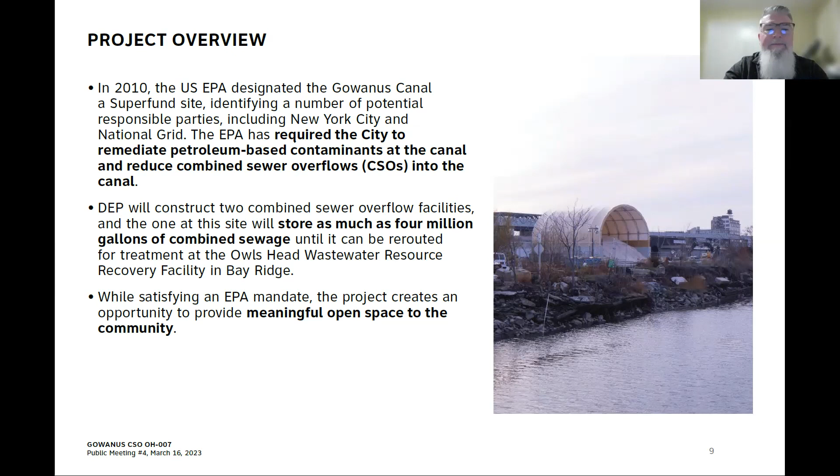CSO retention facilities intercept that flow from discharging into the canal and then store it until after the wet weather event, and then pump that flow back to the wastewater treatment plant for treatment. Next slide, please.

So our goals on this project: obviously the number 1 goal is to satisfy EPA's mandate, but also to construct a resilient and sustainable facility and provide a welcoming and valued community asset. Through these public meetings and other avenues, we've heard from many folks that embedding a sense of environmental stewardship and education into the project is a priority, and we've worked hard to ensure that this project reflects that input. Next slide, please.

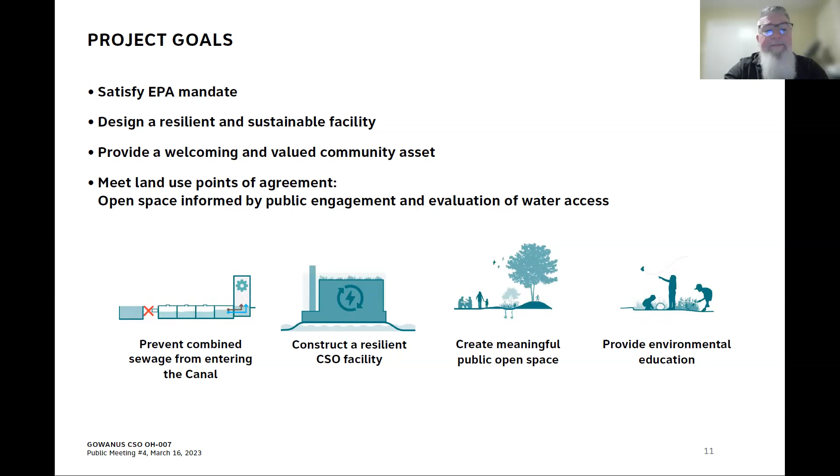So I know many of you are already familiar with the site and know that it has been home to the Department of Sanitation's salt lot, the Big Reuse composting operation, the Gowanus Canal Conservancy's ecological stewardship and programming, and a number of manufacturing and industrial businesses on 5th Street.

So what we intend to do as part of the project is establish the new CSO facility on the site in the location of the existing salt lot. But before we do that, we're going to relocate the Department of Sanitation's salt shed and the Big Reuse operations south of that, and reestablish the Gowanus Canal Conservancy on the site. And then also, as shown mostly in green there, provide a publicly accessible waterfront open space, as well as some ecological restoration.

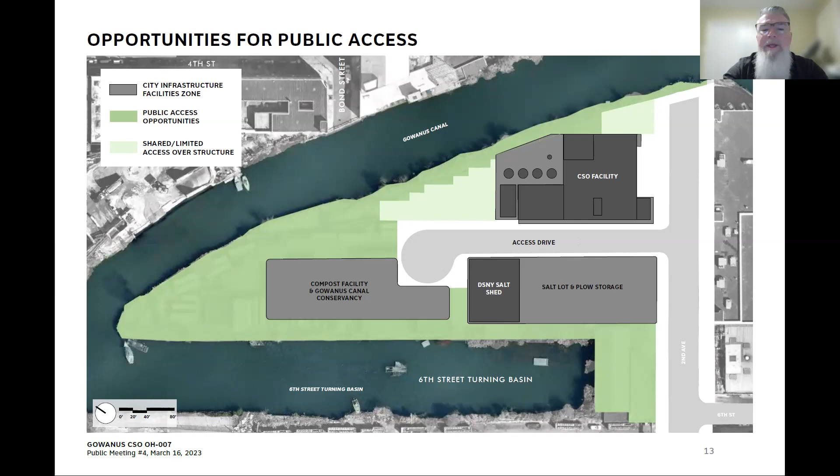We have a very ambitious project schedule in order to meet the EPA mandated milestones, and over the last few short years we've made great progress. The design of the salt shed has been completed and approved by the Public Design Commission, and the design for the first construction package has been submitted to EPA. We're on target to begin that first phase of construction this summer—we're shooting for June.

So Alicia mentioned that this is the fourth in a series of public engagement meetings, and your feedback has truly guided the character and the design of the city's facilities and the public open space. We will begin the first phase of work here this summer, and that very specifically includes the site preparation and construction of the new salt shed and temporary composting facility.

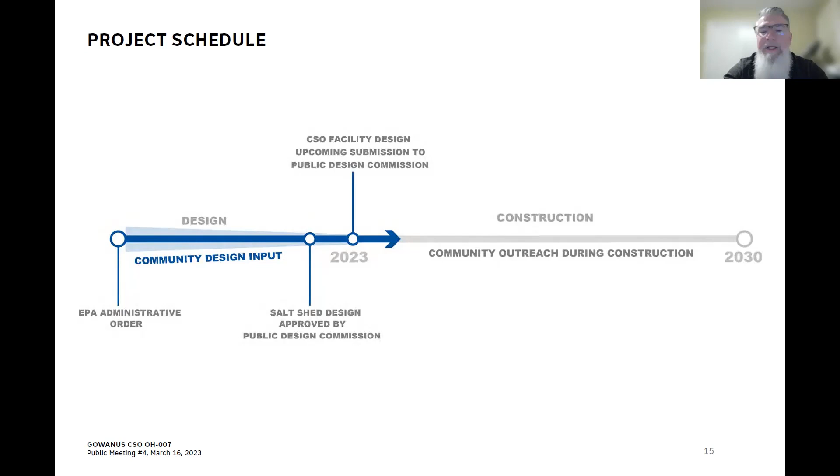And now I'm going to hand it over to Jessica from SCAPE. Great, thank you. My name is Jessica Arias. I'm a designer at SCAPE, and I'm going to give an overview of the design process and the overall site concept.

So we've had three public meetings prior to tonight, and all of the feedback that we've heard has been extremely helpful in helping us to develop the design for the public realm. So we just want to thank you again for taking the time to come to the meetings, and thank you for your very thoughtful feedback.

We've heard some very clear priorities from the community, and we're really excited tonight to be able to show you how we've incorporated those priorities into the design. Some of the things that we've heard overall are the need for ecological restoration, preserving the Gowanus character, the need for different kinds of public water access, and the need for flexible gathering spaces.

So the last time we met, we heard some great feedback. We heard a lot of excitement about the wetland space and the reference to the historic infrastructure in Gowanus, the way it's reflected in the CSO facility design. We're excited about that too.

We heard that the public requested to maintain access to the water at the street end, so we are going to be able to share some more details with you about that tonight. We heard that the need for public restrooms and other site amenities, so those will also be incorporated into the design.

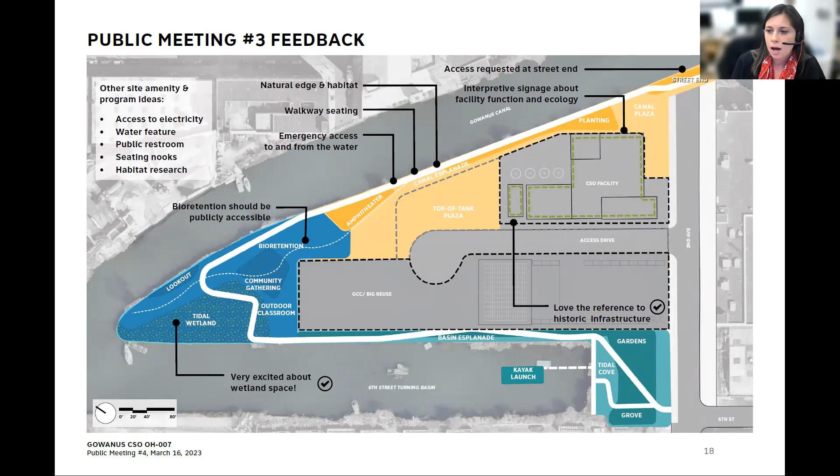And here are some design goals that have come out of this public feedback process. The design will encourage environmental stewardship by providing educational and cultural spaces. These are flexible cultural and educational spaces that will be able to be used throughout the year and by different user groups. The design will improve site resilience through material choice, planting, and bioretention.

This design will provide public access to and along the waterfront by allowing users to get to the water in different ways. The site design will support ecological functions with various estuarine habitat types, including a wetland that will be a very unique feature and provide ecological restoration on site.

And a very big feature is that we are creating universal access to the water. One way we're doing that is with an ADA accessible boat launch, which we've been working closely with the Parks Department to be able to provide here so that the site is accessible to all users.

And finally, the design celebrates the Gowanus character, which is this unique mix of industry and nature, through the design of the facilities.

And in addition to all of the public engagement process, the team's been in very close coordination with a number of city agencies. Some of those are the Parks Department, DSNY, the EPA responsible parties, and the Public Design Commission. We've also been in very close contact with the community stakeholders that are on the site—those are Big Reuse and the Gowanus Canal Conservancy. So this coordination has really guided our public realm design, and of course it will continue into the next phase.

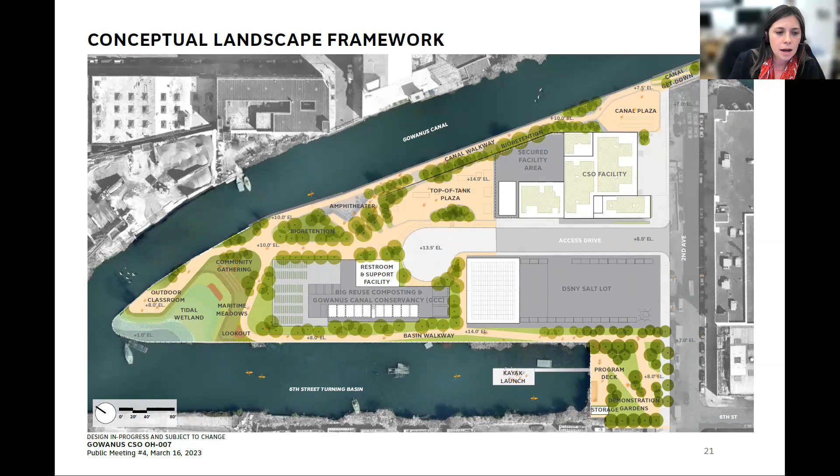At the Canal waterfront, the Top of Tank Plaza and the Canal Plaza are two flexible gathering spaces, which we heard as a public priority. These are gathering spaces that interact with the facilities and functions on the site. The canal walkway connects the plazas and helps bring people down to the water. The canal get-down at the street end helps bring people directly down to the water, and the amphitheater provides a gathering space with amazing views across the canal.

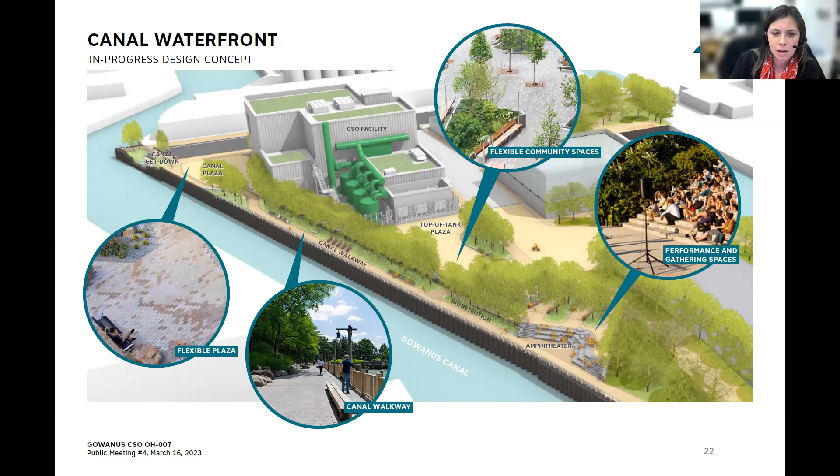At the point, we have 3,000 square feet of soft wetland, which is a very ecologically unique place with opportunities for education that allows for daily tidal inundation. Surrounding that space, there are outdoor classrooms and opportunities for environmental education.

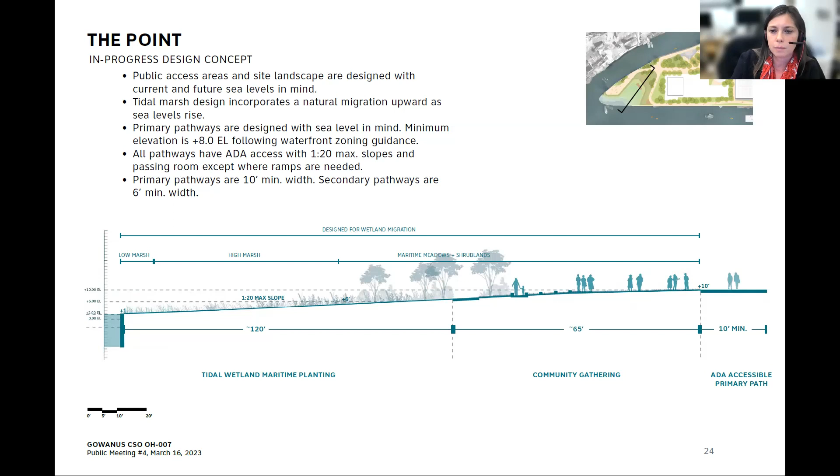This is a cross section. You can see at the top right of your screen this is a slice through that wetland area, showing the gradual slope from the water up to the site. The tidal wetland is responsive to current tides because different plant communities grow at different elevations along this slope. It's an opportunity to see wetland migration in action, and there are pedestrian pathways that lead right up to this unique planting area.

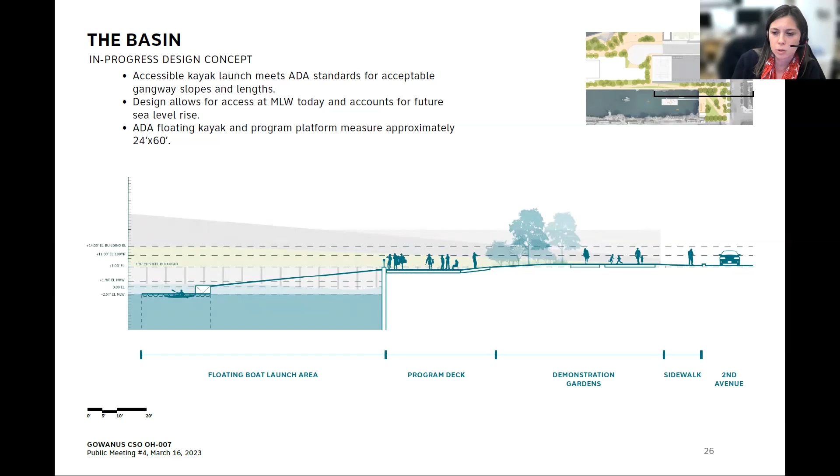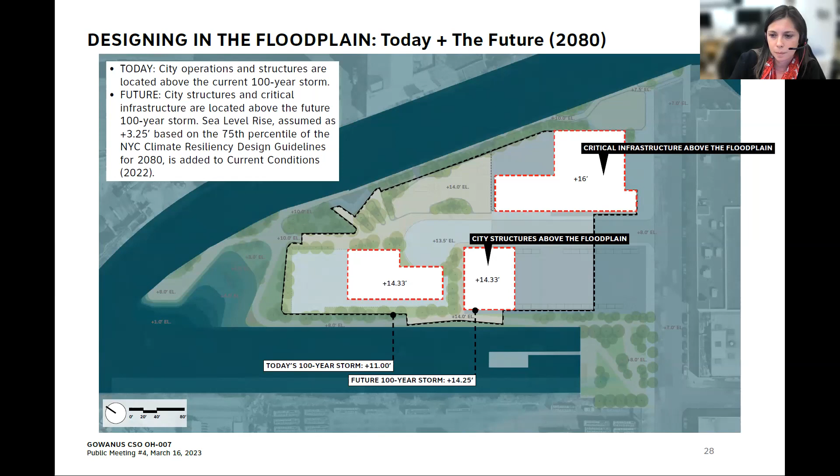So now I will pass it to Kevin, who will talk about the CSO facility design.

Thanks, Jessica. Hello, everyone. My name is Kevin Keating. I'm a partner at Soldorf Architects. It's a pleasure to be here again with you this evening. Please allow me a little bit of your time to walk you through the designs for the CSO facility itself and the area immediately surrounding the head house. The narrative for our design approach really has come from the community, and I hope you can see this in this presentation.

As Jessica mentioned, this is considered phase 2 for the project. It consists of the CSO facility itself, the underground work, and the immediate area surrounding the facility, as shown here within the dashed line.

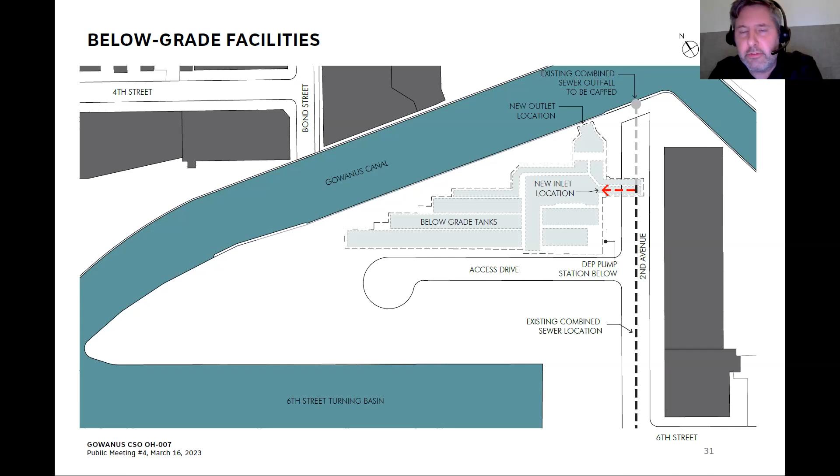Just want to indicate how the facility is located and why it's located where it is. There is a current CSO pipe under 2nd Avenue, which currently discharges at the outfall point that will be capped at the end of 2nd Avenue. The water will be diverted into the facility, indicated where the red line is, coming into what will be the primary screening elements that clear the water of any physical debris that may enter or have infiltrated into the system. The tanks will sequentially fill up as a storm is still hovering over the city. Once that storm dissipates, the water will be pumped through the degritters and down to the Owl's Head water treatment facility in Bay Ridge.

We still have to accommodate them, even though they may be there just once or twice a week, or really just at seasonal times. One important element here, which Jessica touched upon, is the grade elevation changes. We are having to work with a current elevation of +7 feet at the corner of 2nd Avenue and the Access Drive, which was formerly 5th Street, up to a floodplain elevation of +14 feet.

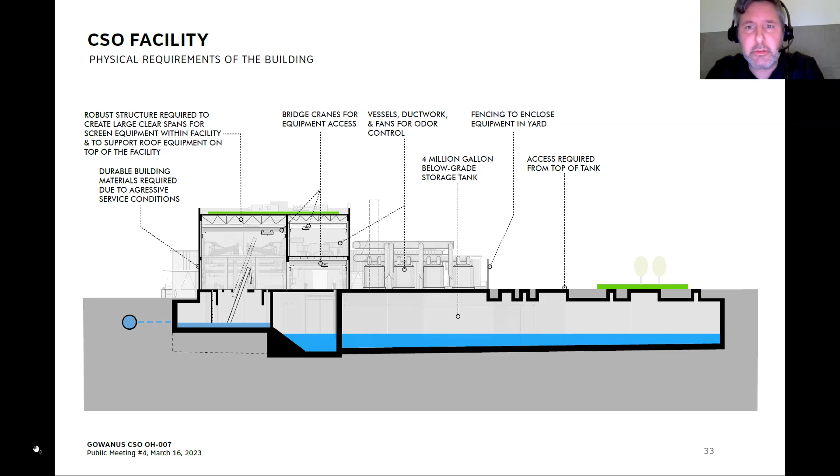We are doing our best to accommodate as much publicly accessible open space above that tank while providing as much bioretention as possible.

We are trying to achieve Envision Gold. We're working with a great group of engineers that are pursuing the highest level of sustainability possible. We will have a strict sustainability procurement process using as much recycled content and fly ash as possible, reducing the overall embodied carbon that may be in any of the material used for this facility.

As mentioned by the community, we are introducing a great amount of green roof on top of the overall facility, as much as we possibly can, to help reduce the heat island effect and manage any rain runoff that may be happening. All sensitive equipment is raised further than the 100-year floodplain; we are increasing that height, taking precaution in the long run. And obviously, this facility is storing 4 million gallons of polluted water before it enters into our waterways.

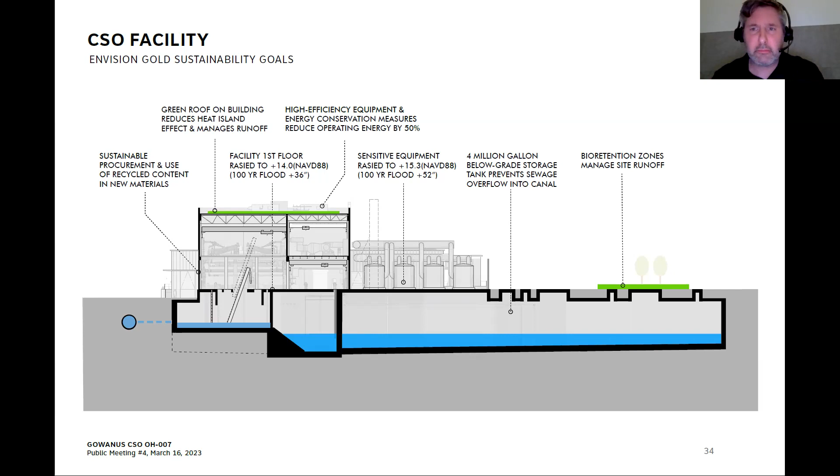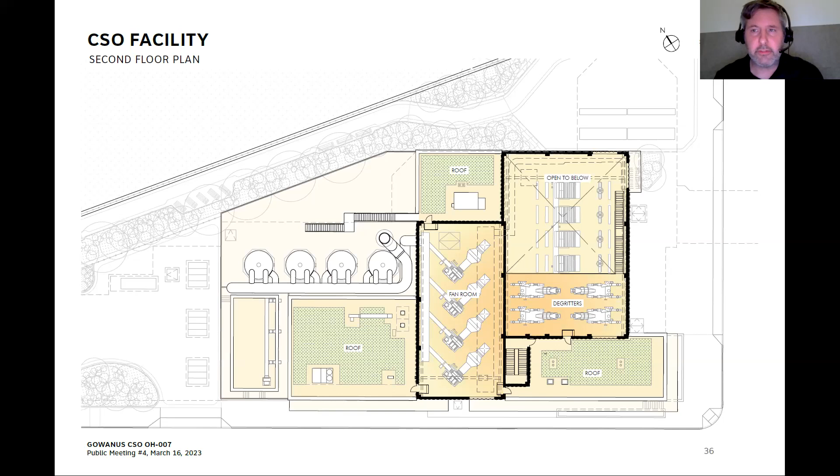Next floor up is the second level. You could see the secondary volumes peel away. On top of those secondary volumes, we are introducing green roofs. The area that projects upward is the large volumes of the screening room and the fan rooms, which support the flow of air from within the facility into the carbon vessels outside. Lastly, the roof plan is being vegetated with as much green roof as possible to help mitigate any stormwater runoff. It includes native, hardy, low maintenance plants that are drought tolerant, which will further increase biodiversity and support pollinator habitats.

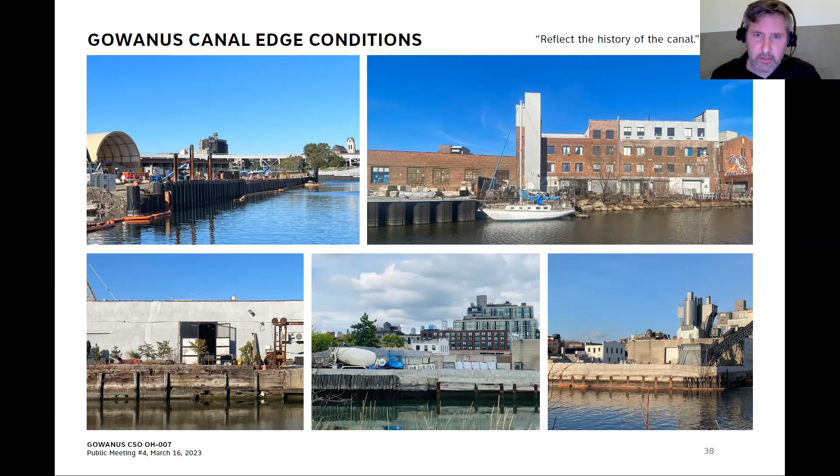These kind of anonymous buildings that are industrious in nature and have this monochromatic building palette. It's these buildings, along with the image on the next slide, that create the vernacular of the environment that we are pulling from.

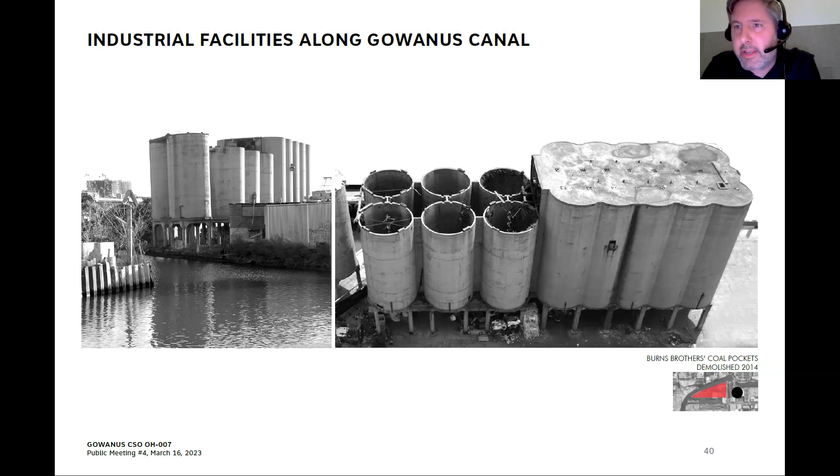The next image, please. It's this vernacular and these geometric shapes that we've really pulled from that speak to the way we've approached the design for the new facility. This was an image of a pretty ubiquitous building type and typology seen up and down the canal over the decades. But this next image is an image of a facility.

This is the Red Hook grain terminal. It's still there, still existing. You can see this beautiful harmonic facade made up of the structural elements of this concrete concave form. It's this aesthetic that we believe the community has informed that they want to pursue and achieve, and we are trying to strike that balance.

This next image shows where we're pulling from, not only the building elements up and down the canal, but also the direct bulkheading that has been introduced over the decades and over the century. It first started with timber lagging, which you can see here, and then evolved to concrete lagging. You can see here this tubular formwork that we will pick up in the next slide.

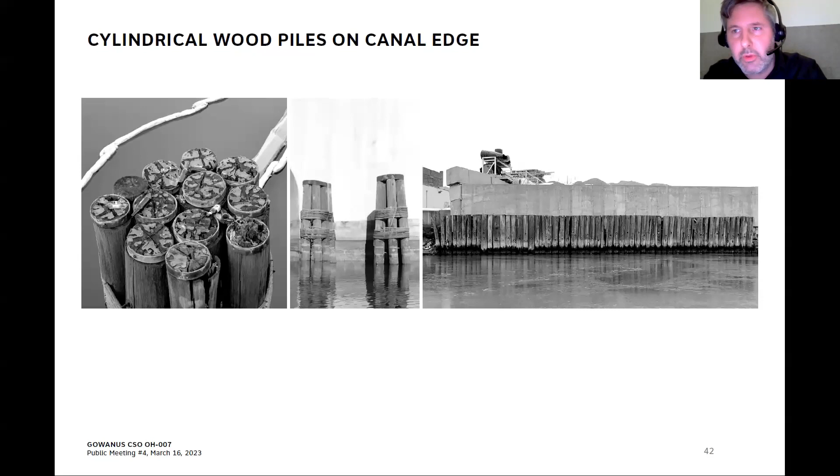With this, we've pulled together a palette to understand what we could do with this simple formwork created from concrete. We started to look at how we could peel away at it and carve into it. We've studied a lot of the formwork, and this image on the left indicates the approach we are trying to take.

This next image shows a relatively simple but monochromatic palette that again picks up on the environment of the Southwest Brooklyn Industrial Business Zone. We are using concrete for the building and its shell. Remember, there is no external shell to the building. The concrete is both the structural element and the skin for this building, further reducing any need for additional material.

Stainless steel is being used for its corrosive resistant qualities, along with apertures introduced to the facade of the building. These apertures will take on the same formwork as the concrete above and below it.

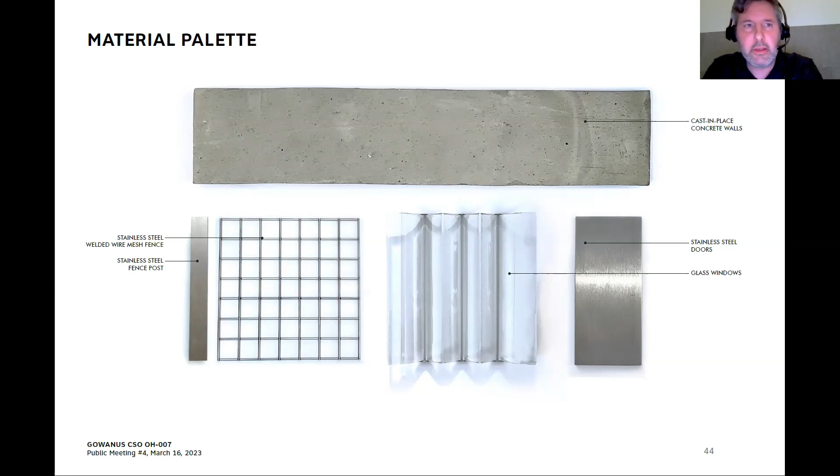This next image shows a series of full-scale models we have built here in the office. We tried to understand the mass of this building, both from afar and up close, because pedestrians will be allowed to literally feel and touch this building as they walk up and around the facility. We arrived at a dimension for these tubular forms of 26 inches, which gives a humanistic quality to the overall facility.

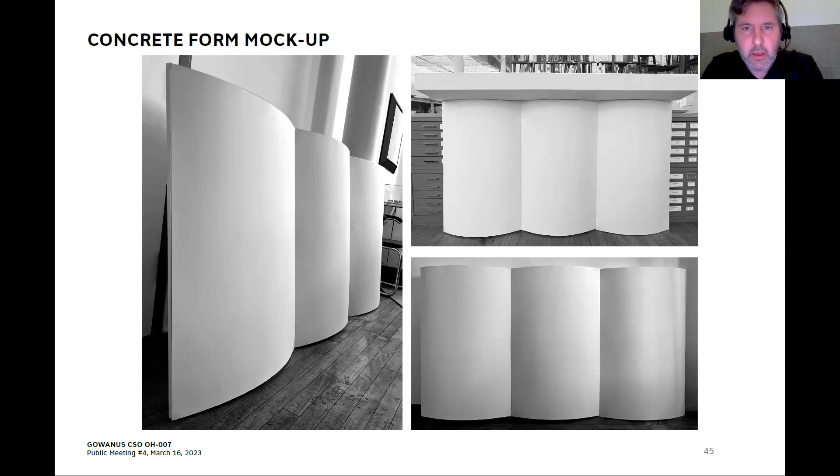There's also additional apertures on the south side, which you'll see in a few elevations we'll present later in the presentation. But with that, I will now hand it over to Anna.

Thank you, Kevin. I'm Anna Hochhalter, landscape architect with Scape, and I'm going to focus in on some of the site elements, the materiality and furnishing.

Those design details will be similar to what we're presenting today in the same design approach, but coordination with different agencies, including the EPA and other user groups, will happen at a later phase. So today we really want to focus on where we are with the design around the CSO facility.

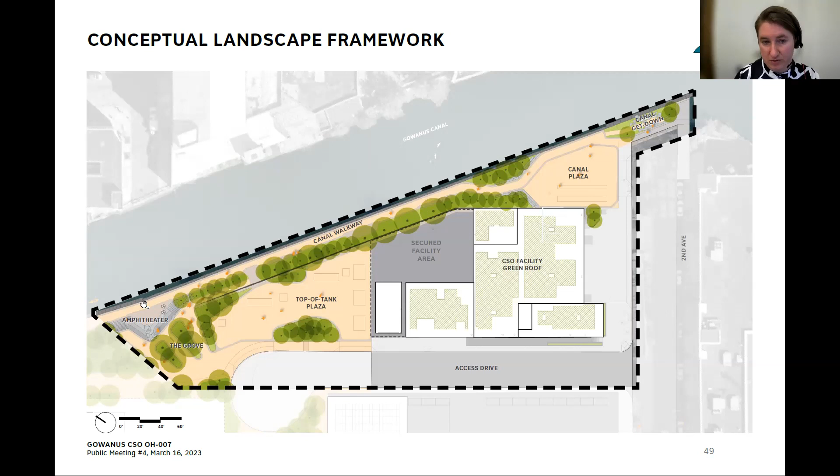We've worked closely with our engineering team to maximize the public realm to the full extent. There are a lot of site constraints here. The operations and maintenance needs are fairly frequent and require a lot of surface area to maintain and operate the very large infrastructure below grade. So there's flexible space on the Canal Plaza and top of Tank Plaza, and those are the areas with the most constraints requiring facility maintenance. The primary and dedicated pedestrian areas are focused along the canal walkway, which is vegetated and outside of those operational needs of the city infrastructure.

In our early engagement workshops, we heard a desire for the project to be reflective of the Gowanus character, and we've been very inspired by the industrial character as well—the roughness of the materiality, the rawness of stones, and an integrated kind of wildness of Gowanus itself.

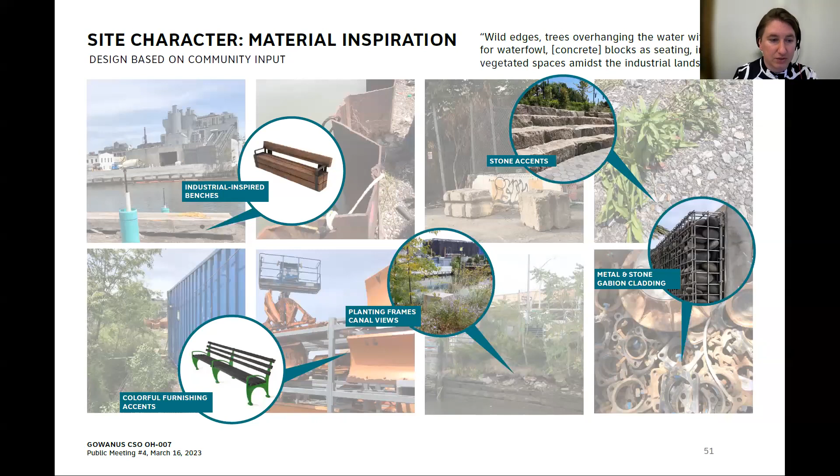At our last meeting, we asked attendees for more information on exactly what the Gowanus character meant to them. We took that feedback and are developing the furnishing and material approach we'll talk through tonight, honoring what we heard—consistent with images showing celebration of natural stone accents, working with raw materials, and incorporating planting.

Our paving strategy uses a hybrid of cool color tones to extend the industrial character and warmer color tones in the paving stones and materiality to accentuate community gathering areas, so you can feel a contrast as you're moving through the space. We're using natural stone and ADA accessible cobble in certain areas to celebrate the maritime edge of the site.

In our furnishing palette, we're using standard agency furnishings with accents of bright color where it makes sense, to celebrate and complement the industrial color pops in other areas, as well as developing a Gowanus-specific furnishing style that harkens back to the historical industrial character of Gowanus. So we're finding that balance.

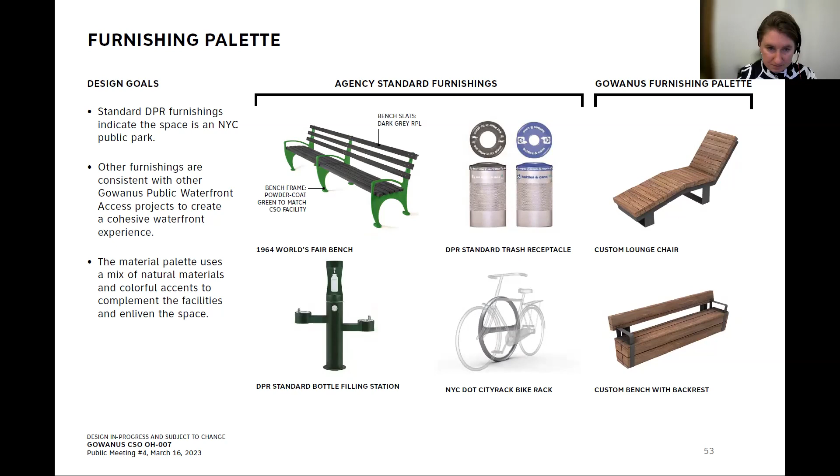Next I'll talk through our site planting strategy. Our design strategy really embraces the wildness of the Gowanus Canal. The input from our last public meetings supported that goal—you can see some quotes in the slide here.

We're designing to restore native habitat to the extent that we can, and to celebrate ecosystems from the past, historic ecosystems of the intertidal floodplain. So we're designing for plant resilience, understanding that the climate is changing—we know the seas are rising, the heat is increasing, and the storms will be more frequent. Our planting strategy works with that and celebrates it on site.

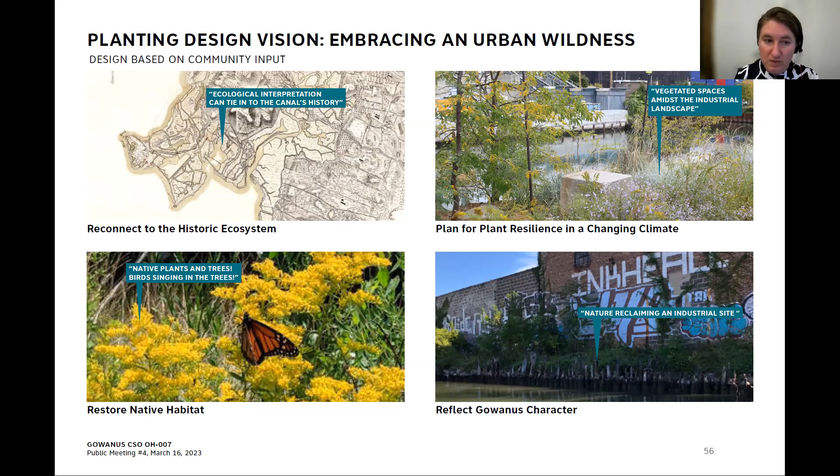Using native plants that are tolerant of coastal conditions, such as salt spray and inundation, for both today's conditions and future conditions in 2080, this planting strategy will be applied along this area within the CSO facility as well as throughout the larger site. We have tidal marsh and maritime planting near the 2nd Ave street end, areas of bioretention and rain gardens along the canal, and a green roof on the facility roof.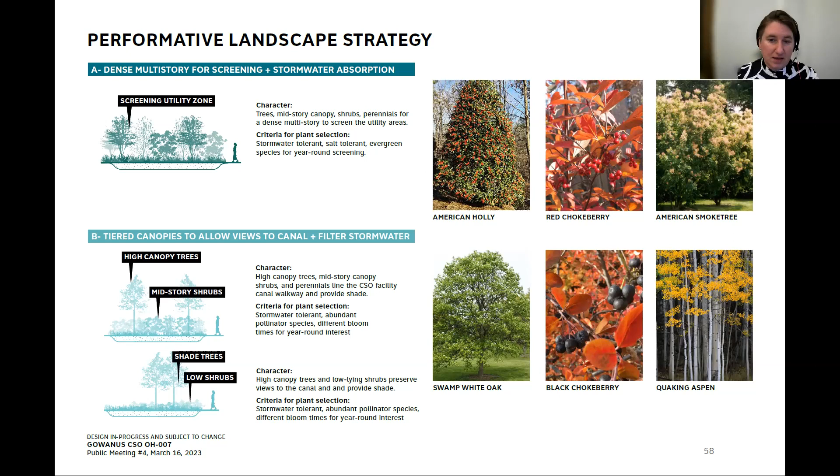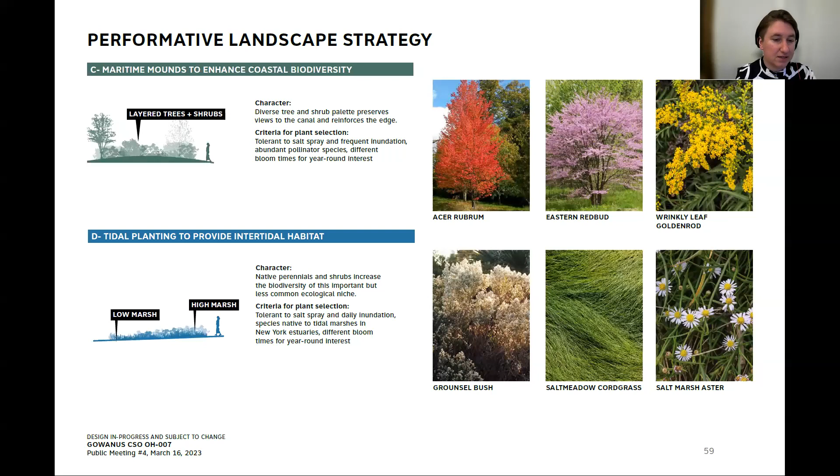These landscape strategies are performing different functions in different ways. Sometimes they're screening the facility, sometimes they're framing views very intentionally using multi-story plant palettes. In each of these areas, they're providing ecological value by increasing biodiversity, soaking up rainwater, and reducing urban heat island effect. I'll turn it now back to Kevin, who will end this presentation walking around the building and site.

All right, thanks Sana. So we just want to walk you into the building, show you a couple more renderings in and around the building, so you get a sense of what we're trying to achieve. In this view, we're trying to communicate the theme of the project, which is industrial facilities set within a landscape. The surrounding greenery provides publicly open space that welcomes people to the site.

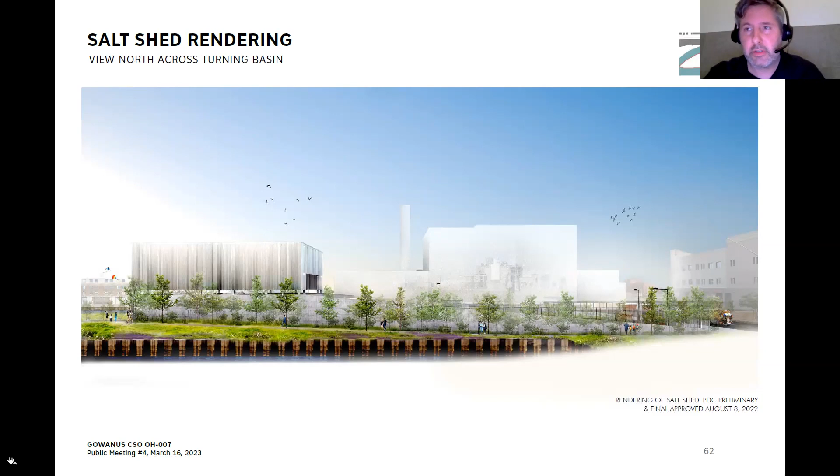Next image here is just to remind you of the salt shed and materiality, and this balance between that natural landscape in the foreground and this industrial facility in the background, both in a balance of harmony. Next image here is getting closer—this is now a view up the access alley, which is formerly 5th Street.

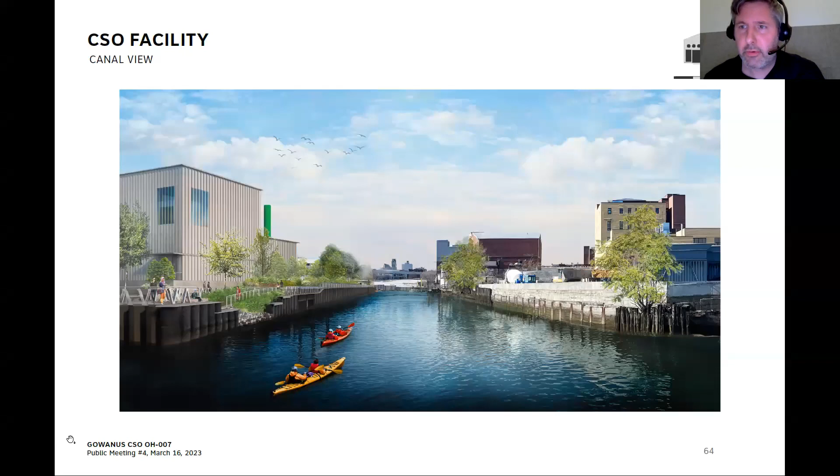Thank you. So we'll zoom in now from that view across Whole Foods to see the canal get-down in more of a pedestrian view, with the Canal Plaza in the background and CSO facility. This view is at the end of 2nd Avenue. We've worked really closely with DEP and the Parks Department to develop a design that can incorporate ADA access to allow people to get closer to the water.

This type of informal scramble also includes dedicated seating areas. In the background of the image, the Canal Plaza is activated with a paving pattern inspired by tidal mudflat patterning. There's also opportunity for interpretive elements along the facade of the building. The walkway extends away from the facility with a series of stone steps and planting to allow for the elevation change up to the canal walkway, signaling the beginning of the public waterfront walkway in the background.

The next image shows a section slice through the street end, showing that the lowest portion of the get-down is expected to be inundated during high tide.

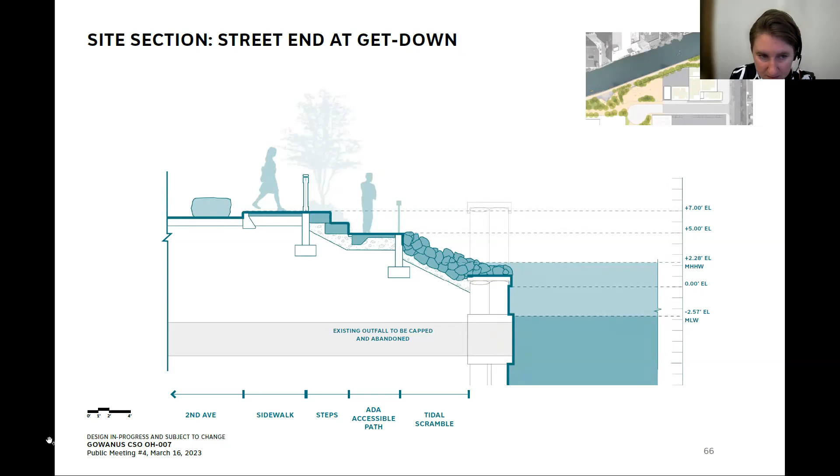This canal walkway image gives you a sense of the type of experience along the linear walkway, with the canal on your right, the Gowanus guardrail—which will be a common element across a lot of waterfront sites along the Gowanus Canal—and integrated seating on your left, nestled between lush planting, in a tiered approach that navigates the height of the CSO facility tank on your left side.

Here you can really see that two-tiered approach as we're navigating around the CSO tank, below grade, and the bulkhead structures. There's bioretention and green infrastructure integrated where possible.

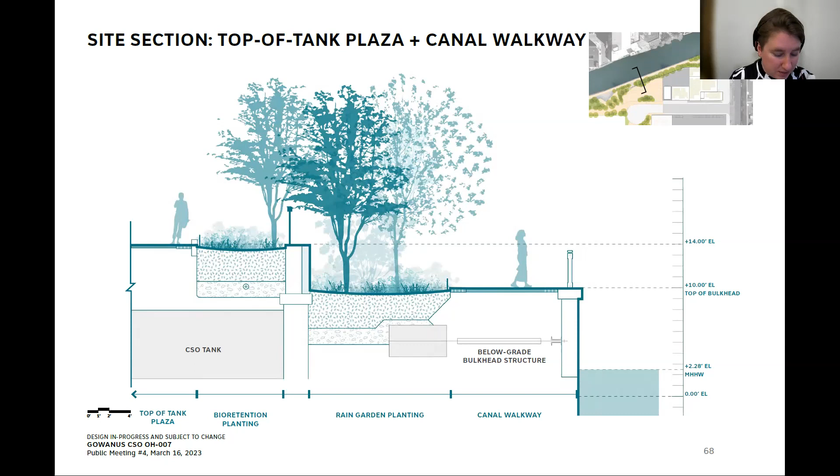This is immediately adjacent to the Bond Street end. You can imagine shady groves of canopy trees over this amphitheater and an area for programmed or impromptu performance. The next slide shows a section slice through that tiered nature of the amphitheater.

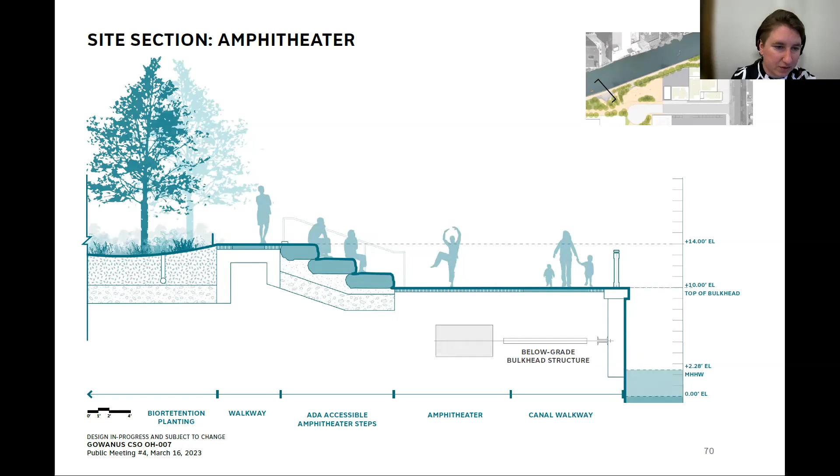This is a view of the top of Tank Plaza. This is another area that's quite constrained, with required access hatches to the below grade infrastructure. So we're activating the plaza again with a paving pattern.

You can see it more closely in this image, mimicking a mud flat pattern. We're trying to activate these large areas, and we've placed seating and benches in shady areas as well as bioretention areas outside of the operational needs.

In that last image, you can see down to the canal. You could imagine this tiered view down into the canal walkway and into the canal.

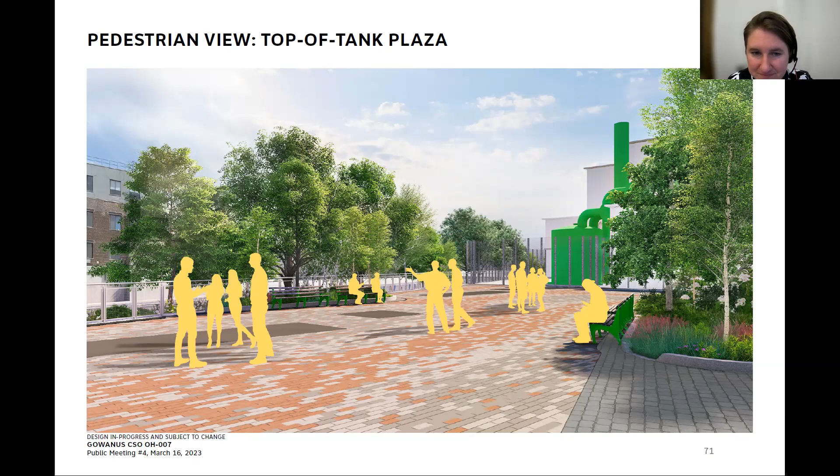This is our last graphic image here, showing how all these elements come together on site. You can see the relationship between the public realm and the buildings, and the design of the tactile architectural approach.

Really showcasing the project goals of treating the combined sewer overflow, constructing a resilient CSO facility, and creating a meaningful public open space that can provide environmental education.

Just noting that this is where we are in the design phase now, focused on this portion of the design. In future design phases, we'll work on the tidal marsh at the point, the kayak launch, and some of the other public realm images we saw at a higher concept level earlier.

So, awesome, thank you so much. Now I'll hand it over to Anna.

Yeah, okay, so we've had quite a lively chat going, and we've been working to respond to some of those comments, but we have some time now to do some Q&A, and Jessica's going to bring up the Miro board, which has the little post-it notes. We'll be able to track your comments as you ask questions, so please tell us what you think.

We've worked really hard over the last year to facilitate these meetings, to get a good sense of what your priorities are, what you want this space to look and feel like. I'm really proud of this team and all the hard work they've done, so I just want to take a moment to thank them as well as all of you for coming out and sharing your vision.

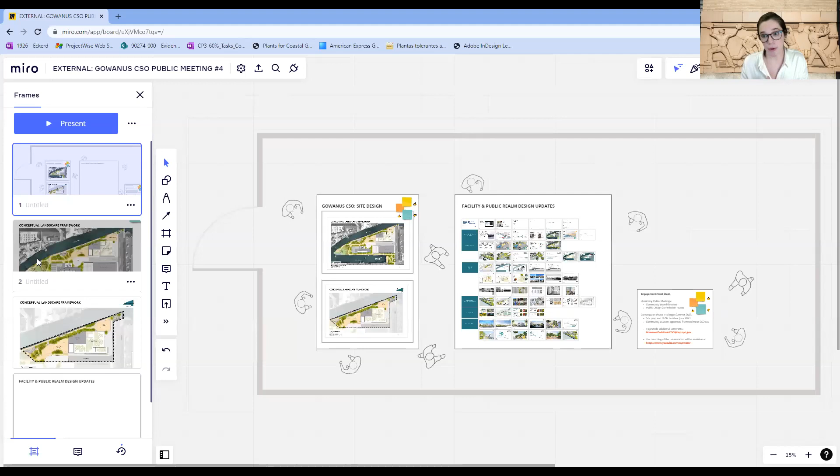All right, David, you are at the top of my queue here with your hand up, so feel free to unmute. Hello. Hello, how are you?

So a couple comments and a couple questions. First, I think this design is impressive, and I want to say I'm really looking forward to seeing this built. You guys have done a nice job responding to the community. Alicia and Kevin, thank you, and to the Selldorf and Scape teams, I really appreciate your efforts.

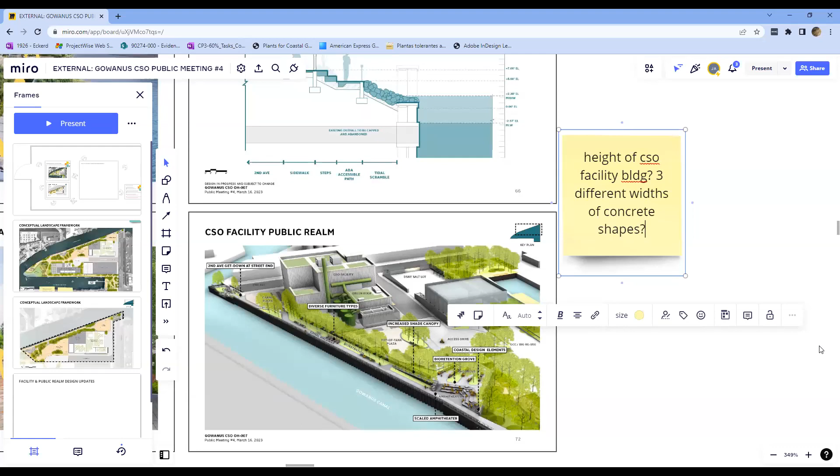I love this rhythm you're establishing on the elevation, but given its size, I think you could keep pushing that. I was wondering if you could come up with maybe 3 different widths of these concrete shapes. I don't think they all have to be 26 inches, and I don't want to tell you how to design the building, although I guess I kind of am. But given the bulk, it needs to be more supple in a way, or maybe have more penetration. So those are my comments.

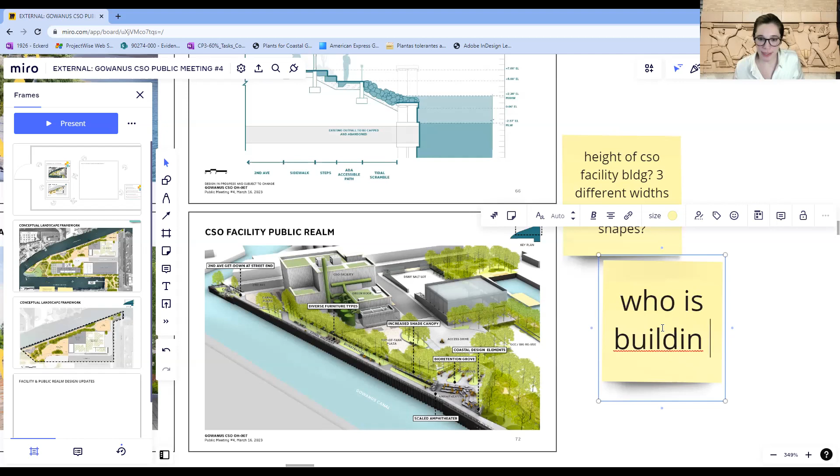Now I have just 2 particular questions, and then I'm going to advocate for something which Alicia probably already guessed. Who is building the GCC big reuse facility? So we're going to be building that back out as part of our contract. Okay, how big is the restroom facility that you're showing?

So it's a little bit of a placeholder at this point. We're still working through the program requirements and also talking to the Parks Department about best practices. But that's in the next phase of the design focus. As the team has mentioned, we're really very focused on the piece that is due into the EPA this summer.

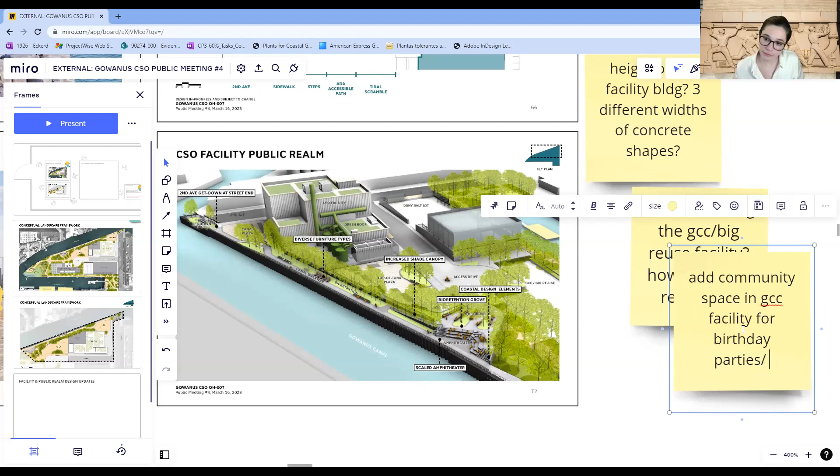All right, so look, you've really done a nice job. I really think there needs to be a community space down there, not only for community meetings, but for birthday parties, exhibits. We have a strong arts community in Gowanus, and a lot of it's getting pressure to be pushed out because of the new development. And a 400 square foot space, I don't think is going to have much impact on the overall budget.

And it's easily obtainable on the site. So I've said it at every meeting, I'm going to say it again. I think that's pretty low hanging fruit, but otherwise, great job. And that's it. Thank you. Thank you, Dave.

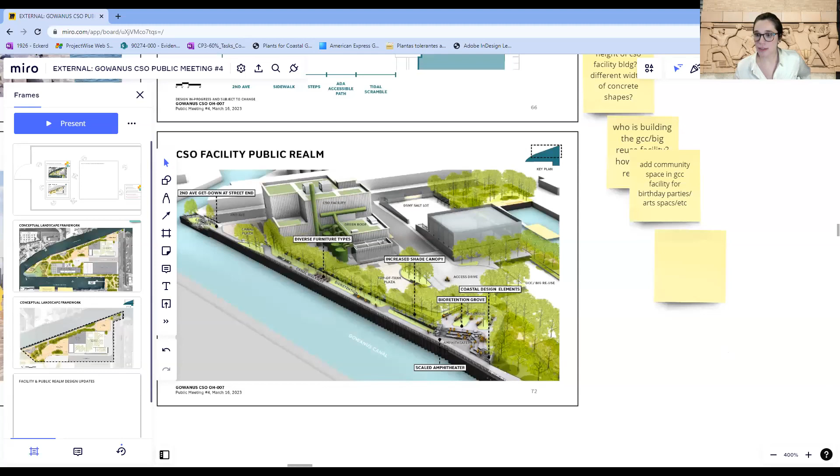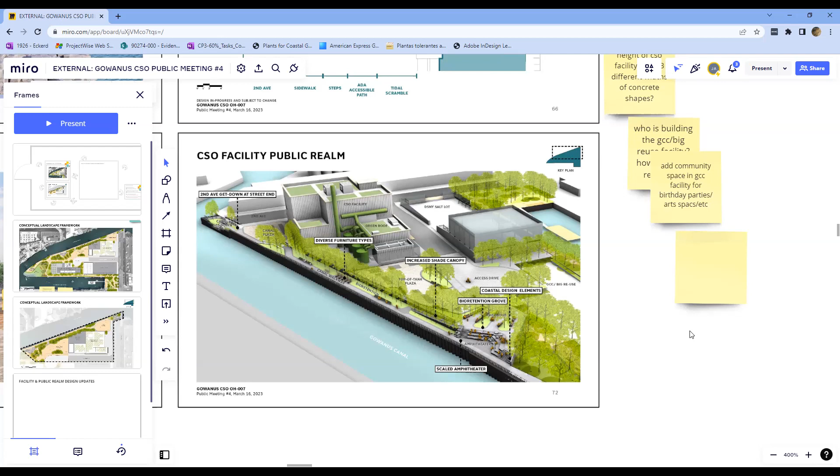Hi, thank you. I'm having a hard time getting my head around the proportions of these spaces. How wide is this walkway that goes around the bottom of this photograph? And a follow-up question after that: how big is the amphitheater and the classroom? It sounds big if you're calling them that, but I get the sense from looking at the drawing that they're really much smaller than a theater and a classroom.

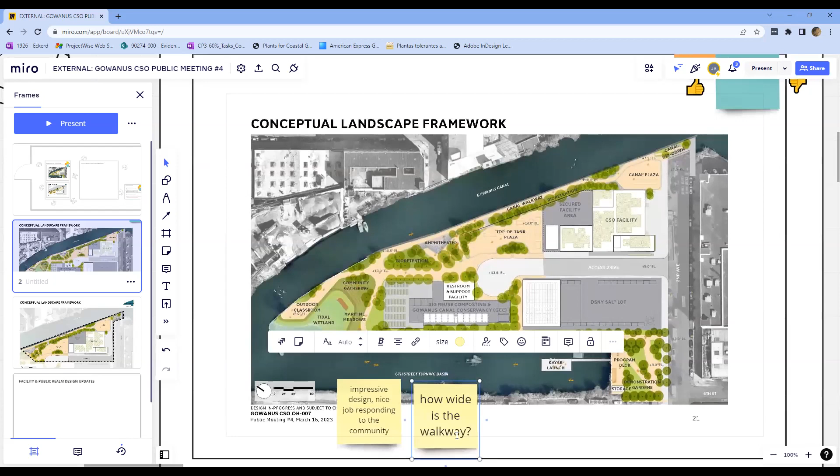So, to your first question about the walkway width, the path itself is 10 feet and then there's 10 feet of planting, so it's about 20 feet total. To give you some scale, the sidewalk on Fifth Avenue is how wide? 15 feet, right?

I'm not sure which Fifth Avenue. I'm just trying to compare it to something I'm familiar with. Your standard sidewalk is 15 feet, so this is narrower than a standard sidewalk on a commercial street. Well, I would say the context is quite different. Yes, which is, I think, worth considering in this case.

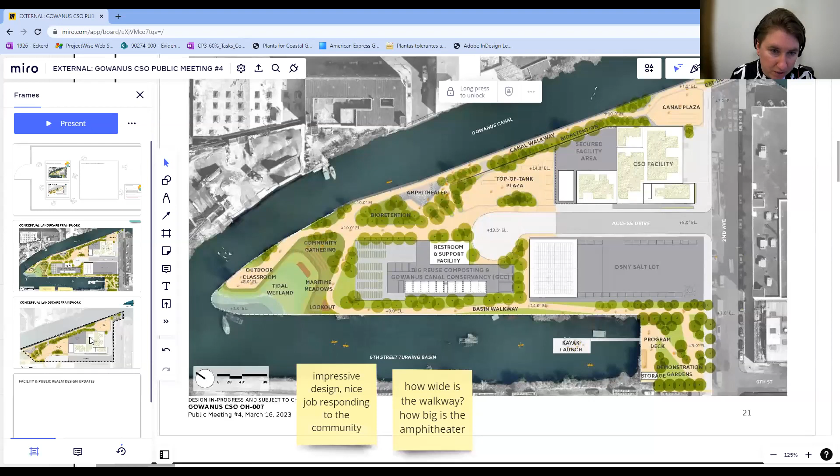The available space to the water's edge, between the CSO facility subsurface requirements and the surface requirements, was only 20 feet. So the whole team tried to give as much room as possible at the water's edge, and that 20-foot width was about all we were able to do. I just want to know what the answer is, because you're presenting it and I'm thinking, oh, maybe it's 30 feet, that would be beautiful. No, it's 20 feet. Okay, let me manage my expectations.

It's 20 feet. The amphitheater, square footage-wise, is about 1,200 square feet. Which can seat approximately how many people? Not crowded, I don't have that number at the moment. Jessica, can you zoom into the axon, into the amphitheater area?

Are you able to zoom in closer? Well, it's close to the same size as the one we currently have at First Street. We've had about 50 people there, just so people understand the context. I'm not sure, we can get back to you all on that as well. But do you want to go to the rendering, Jessica, since you can't seem to zoom in on that axon anymore? Just to give people a sense of scale.

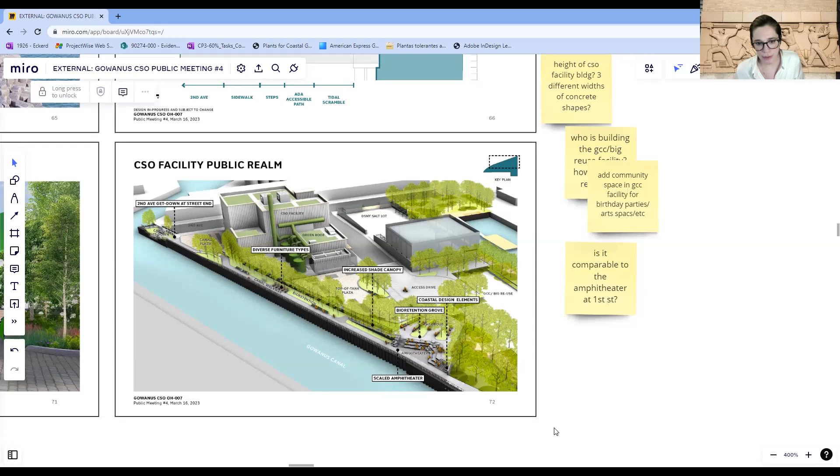So if you had a classroom, a class trip to that space, you could comfortably seat everyone in your class in that space. I think so, yeah. Given that classes are 35 people.

In our earlier design, we had it quite a bit larger, and we did scale it down to feel more appropriate to this zone. There's also a large gathering area at the top of the tank, and those are much larger.

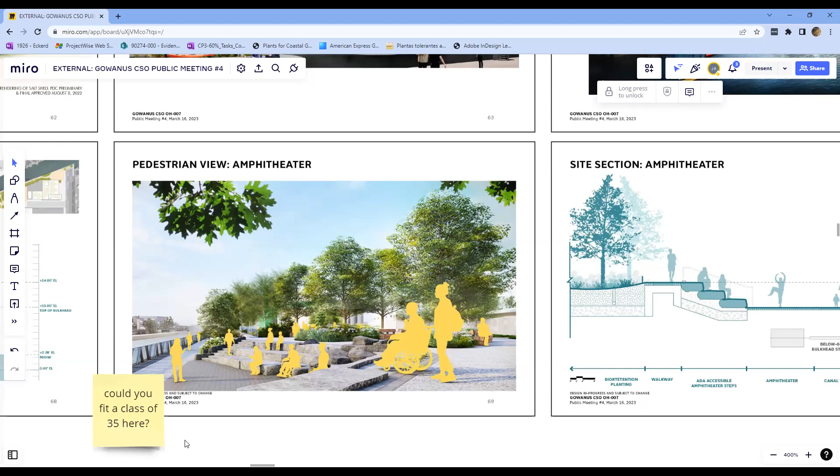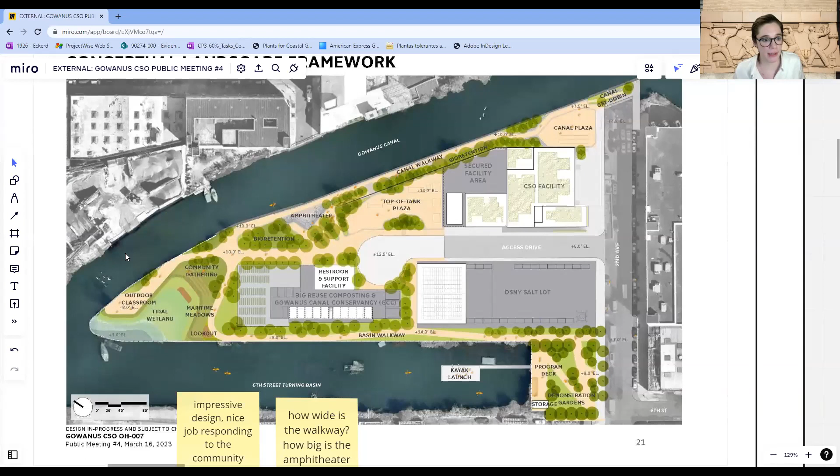And what about the classroom at the end? Tell me more about that. I'm a teacher, you say classroom, I envision... I think it's intended as sort of a flexible space, as Jessica mentioned. It hasn't been fully designed yet, but in our mind's eye, Jessica, can you pull up that inspiration photo? It's sort of informal seating, some shade for people to use, and a space that can be tailored to whoever might be using it at the moment. So it's not particularly prescriptive.

So again, back to the question: if I have a class trip coming to the space, might we use that particular area for a class project related to being there? Yeah, I think that's absolutely the intent, and as we move forward with design, we'll be keeping that in mind.

Why does the green have to be so bright? I'm a big fan of celebrating our infrastructure, and I think the pop of bright green is our odor control vessels, and I would say they're one of the most important parts of that facility, so we definitely want to...

I agree with you in general, but your introduction was that you wanted it to be historically accurate and reminiscent of old buildings, and therefore the color should be more appropriate to old buildings. Well, I think it's also an interpretation of a lot of the vernacular design elements around this site. Jessica showed some bright pops of color on shipping container units and that type of thing, so we're drawing inspiration from that as well.

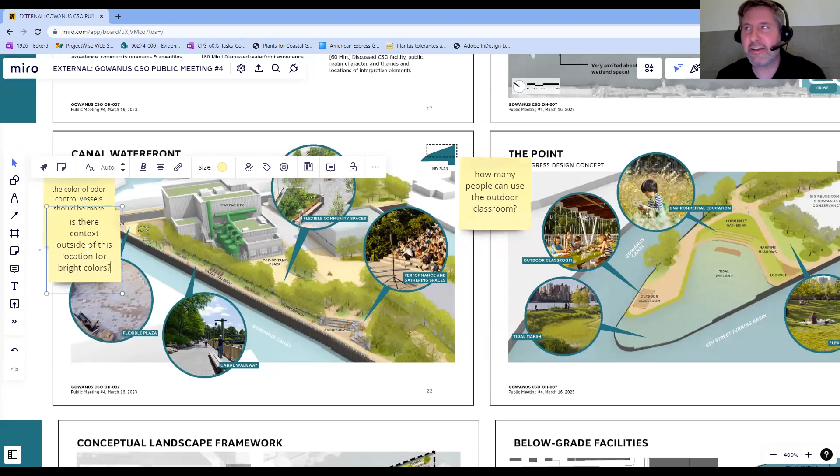But thank you, is there context outside of this location for bright colors? I think it's sort of an industrial context. But I can ask the architect to speak more to that if you'd like. I think everybody has colors, it's extremely subjective.

Your comment about a darker green may be one perspective, but I think the balance between this brightly colored vessel that's celebrating this mechanical componentry of the facility is something we want to draw attention to. So we haven't finalized the exact color, but it is extremely subjective.

But you could kind of see where we're coming from, and I totally understand. I know where you're coming from. Back in the days of people living in lofts with exposed pipes, the big trend was to paint the pipes bright colors, like the reds. No, I know that, but I think it's taking away from the trees.

We will, once we finalize the imagery and the colorization of the planting palette, that will help inform us a little bit on where we take that. So thank you for your comment, appreciate it.

All right, Louis, we've been responding to a number of your questions in the chat, but please feel free to unmute yourself. I have not looked at the chat, and eventually I assume I'll be able to view it after you close this project down, right? Kevin's been working on responding to every one of your comments, Louis. Yeah, right, just a criticism of the presentation: when you said put the questions in the chat, I didn't realize you were going to take voice questions first. I assumed you'd go right to the Q&A as it was typed out.

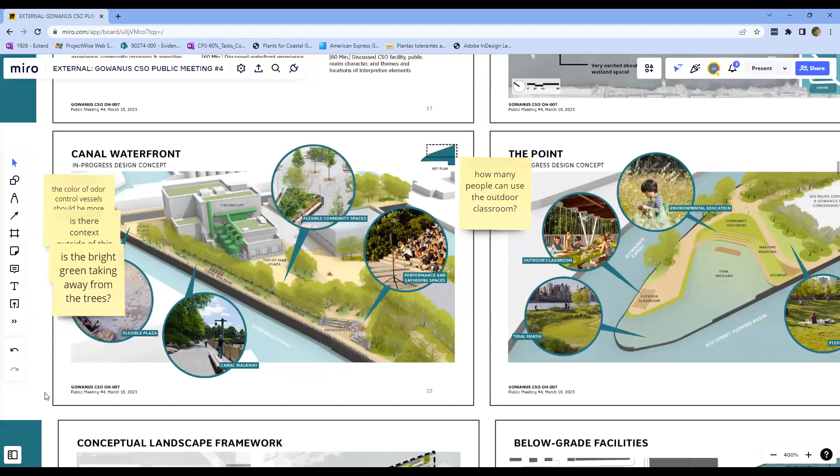And I know we're going to run out of time with all the votes, but that being said, I'm going to hone in on the one thing I like to know about, and that is the fact that you keep referring to a kayak launch when in fact it is canoes being used basically on the canal. And both the storage and dock space requirements are different for canoes than they are for kayaks. I'm hoping you'll contact Gary Francis and the other boaters for space requirements for canoes.

Yes, absolutely. We have had a meeting with the dredgers, as Jessica mentioned earlier in the presentation, and I am in touch with Gary and with Celeste and some other folks. So their feedback has been immensely helpful, and we will get some canoes into the renderings for you. Thank you.

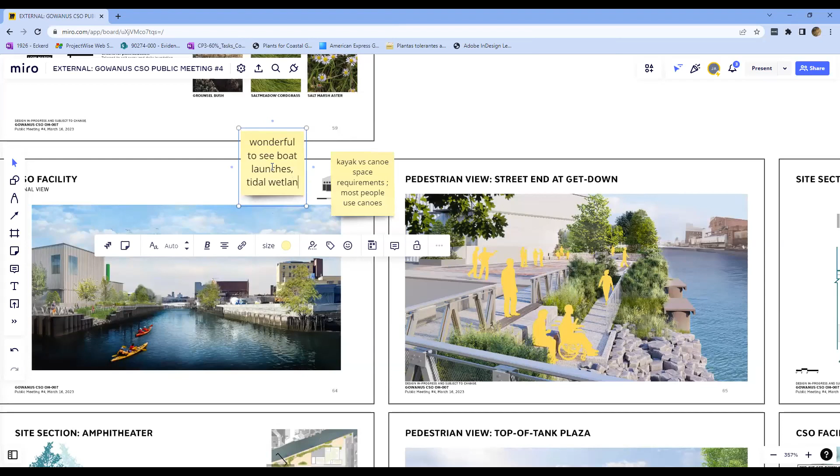In particular, it's wonderful to see the boat launch and the get down at the dead end of 2nd Avenue. Love the amphitheater, the tidal wetland is awesome. I think just making sure it happens and figuring out how that coordination works with the Superfund will be really critical. There was a wetland shelf previously in the 6th Street turning basin, and I don't know if it's possible to maximize the wetland pieces as it makes that turnaround.

Oh, you're breaking up a little bit. Is it just me? No, she broke up there. Oh, lost you, Diana. Oh, she froze. Okay, Diana, we'll try to come back to you.

I think your question was about the wetland shelf that we were talking a little bit about early on in design on the turning basin, and I know you and I had talked about that a little bit. I don't know if I lost her completely. Maybe we'll wait for her to rejoin so I don't answer her question without her being here.

Diana, just put in the chat when you get back on. I see, oh Zoom, how we love you. I think I disappeared, did I? There you are, okay, you're here. Okay, finish your question, sorry.

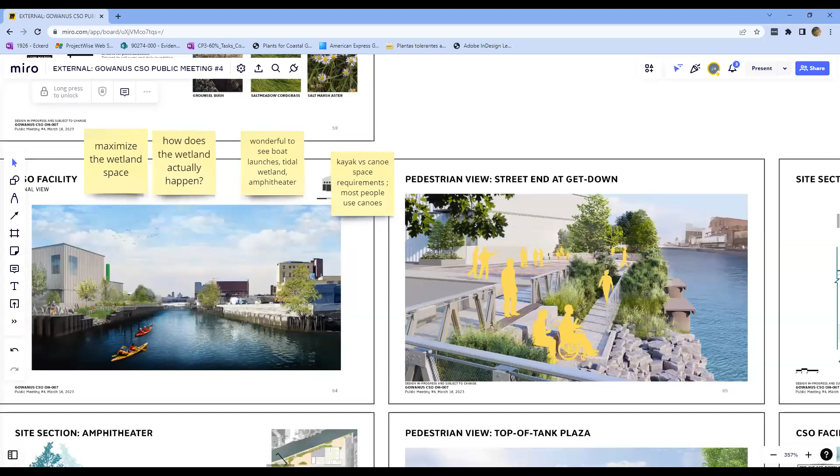I'm sorry, okay so I think on the outdoor classroom, I wanted to make sure there would be various things in that structure, whatever it is, including things like running water, electricity, and storage. And I'm wondering about how it could be combined or doubled as a community facility, which also came up in the chat. So I think that'll be a really important thing to figure out in the next phase of design.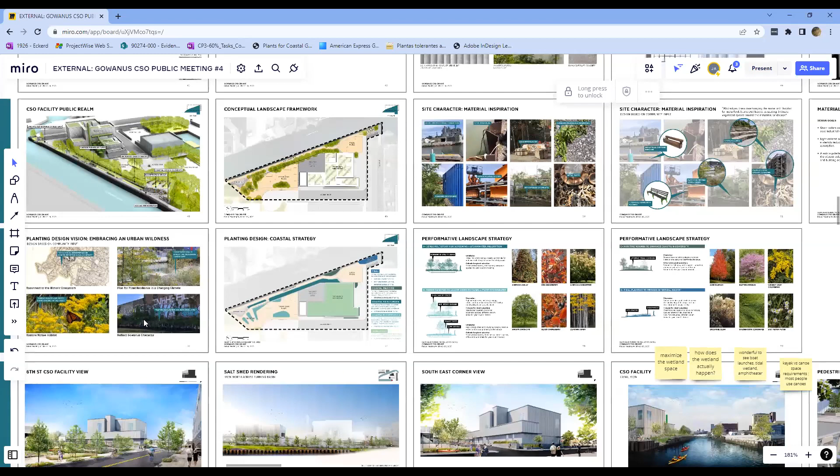And then really cool to see the planting palette. I think that was touched on quickly, but my one comment, and I liked everything I saw, is just thinking through the things that will be really aggressive that we love, like the Baccharis, and making sure there's not too much of that in the beginning because it's going to come in and spread on its own. Okay, I'm done. Thank you all, really helpful. Thank you so much, Diana.

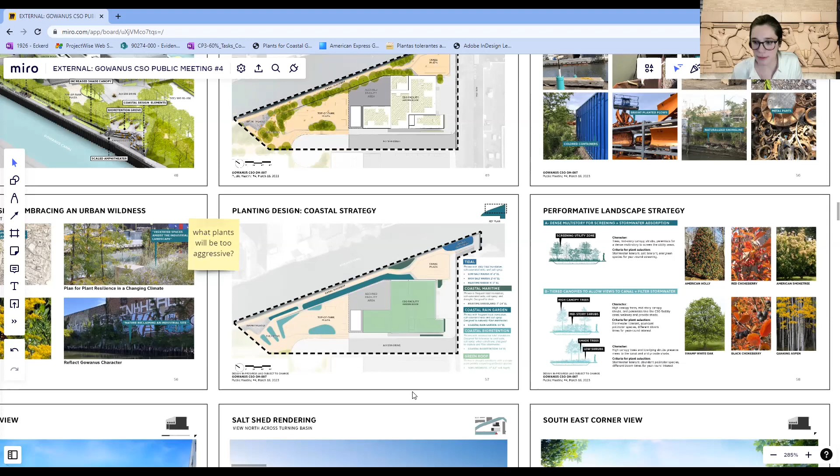I want to make sure you were asking me about the wetland shelf, right Diana? Yeah, so I got a little bit more information after we had talked last time. One of the challenges with that has to do with the permitting associated with it, because you're basically taking away from open water space. So that's one of the major complications with it. So we can keep talking about it, but I wanted to let you know since we had talked about it previously.

All right, Lisa, you have another question? Or is that an old raised hand? No, but you called on me just as I had an idea. Picnic benches in the classroom so that you can just set up and do something. But I'm gone now, okay, thank you so much.

Did you say picnic benches? I missed it. Did you say benches or picnic tables? Benches? Okay. And they've got some nice ones at Carroll Park.

If I can just add a comment, it's really great that the comments that a lot of you are providing are in this early design phase, actually, because we have not yet gone into the detailed design for those areas. So we will be able to incorporate and respond to the comments through the design, in coordination, of course, with all of the agencies.

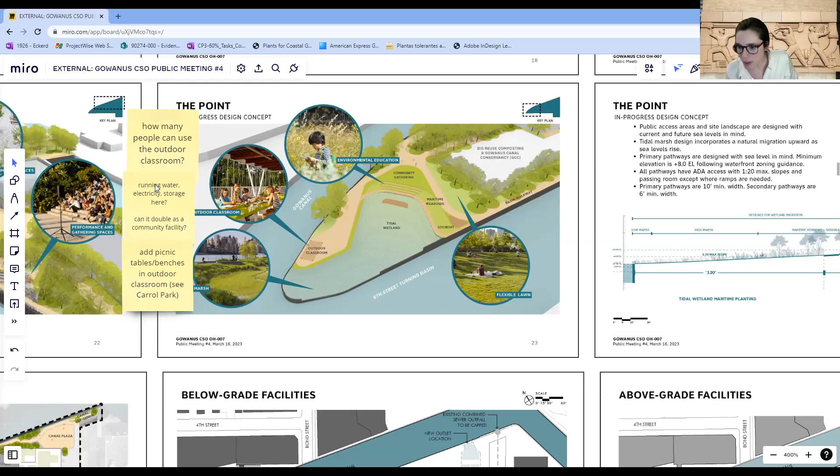Patricia Nolan asked about pavers and cobblestones. Has anyone assessed all of the problems that occurred at Whole Foods with sinking and uneven pavers? The issue at Whole Foods was related to the pilot work taking place in the 4th Street turning basin directly adjacent to Whole Foods. There was a lot of settling that occurred, mostly because they were trying out different methods for installing the new bulkheads. Once that work was completed, there were a lot of repairs done to the pavers at Whole Foods. I don't expect that to be a problem on the CSO tank site once we're done.

Ira wrote, bike racks are shown, but the space is not large, so I think one would just lock the bike at the entrance and walk around. You don't want bikes on that walkway unless it's just moved. Yeah, that's right, we do have the bike racks at the end of 2nd Avenue in that area.

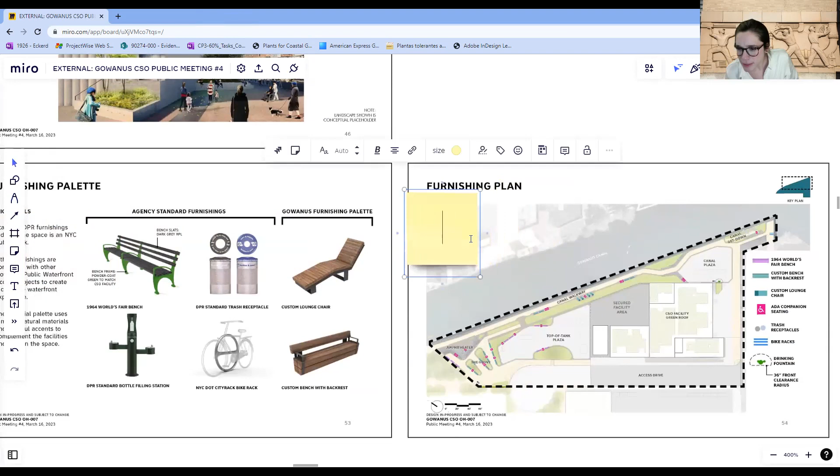Josh says, love the green. Diana thinks it looks like the Carroll Street Bridge, but wasn't sure why. Oh, the bright colors, thank you. Green will be nice in the winter. I love the bright green, super engaging for education purposes.

I think there's a couple of new hands, Owen, you're up. Go ahead, Kevin. No, I just think there's a couple of new hands that are up. Yes, I was just going to go to Owen because I got to some of your questions now. So do you want to just speak to them so I don't have to read them? Yeah, you don't have to read any of them, or hopefully you read them after today. I will read them all, I promise.

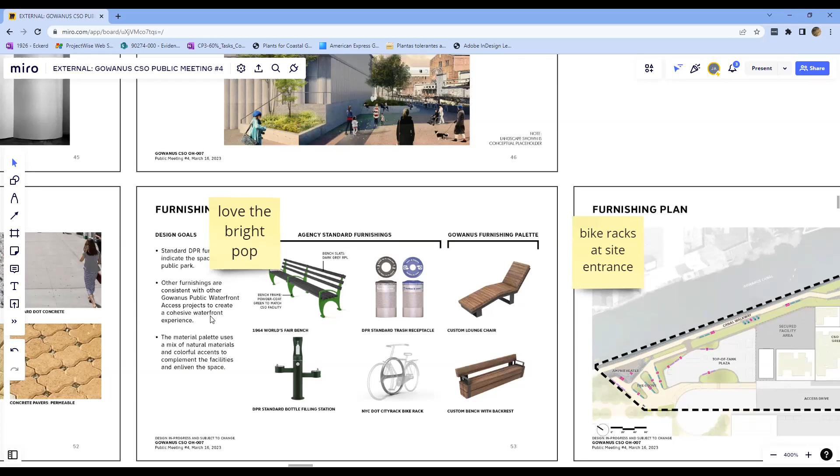It's just, I think the number one issue here is if you are putting bicycle racks for personal cycling equipment storage, consider canoe racks or kayak racks for personal kayak storage. Most waterfront municipalities throughout the country are embracing that idea equally. It's at your own risk, but the same thing when I see people locking up $500 bicycles on a city bike rack, so why not?

Second, the real minutia: we've got a great solar seating power charging station on the bikeway at the edge of the Red Hook Basin, but you have to go all the way out to get to it to charge your phone if you're running low on battery. It's a nice seating area, but something that could potentially be added elsewhere, since people nowadays often need to charge their phone, if you're not including that in the light fixtures or something like that.

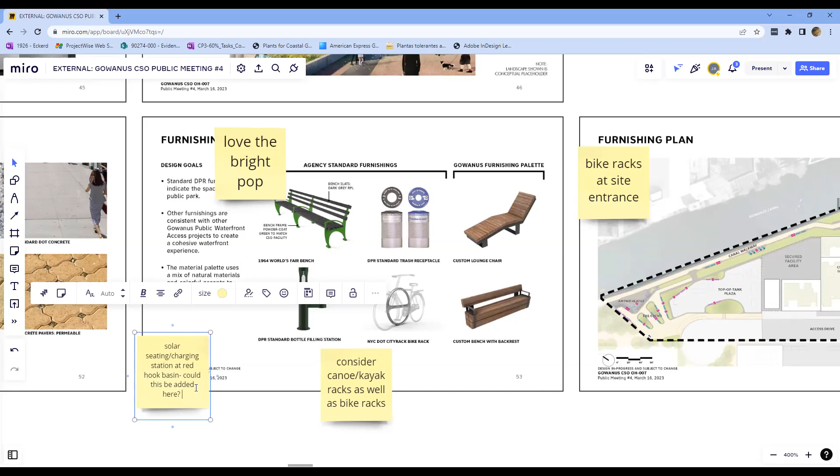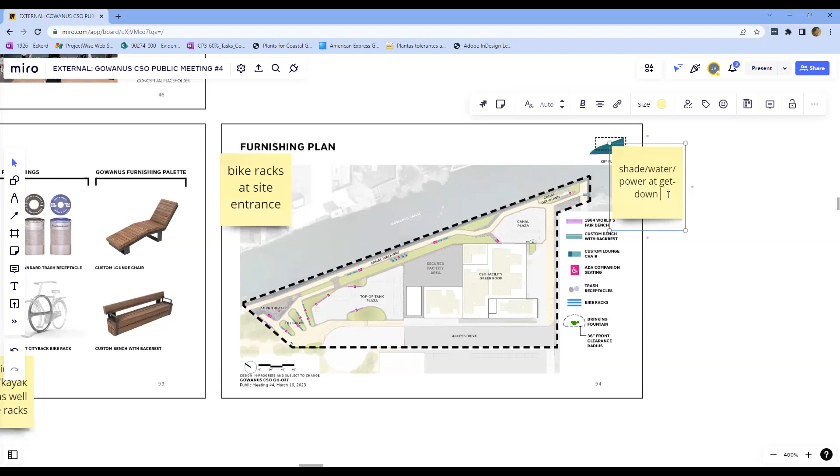And then lastly, most importantly, I would say, particularly at 2nd Avenue, some sort of shade protection and water and obviously power, so that if programs happen at that end. I didn't see where all the drinking fountains were, but I would think that would be a great addition to the get-down over there. Something we suffered from when we used that get-down for many years, we didn't have that access, and it would have been quite appreciated. So thank you, but everything else I was kind of throwing into the comments. You don't need to answer them in today's meeting, just so you have a record of thoughts and suggestions.

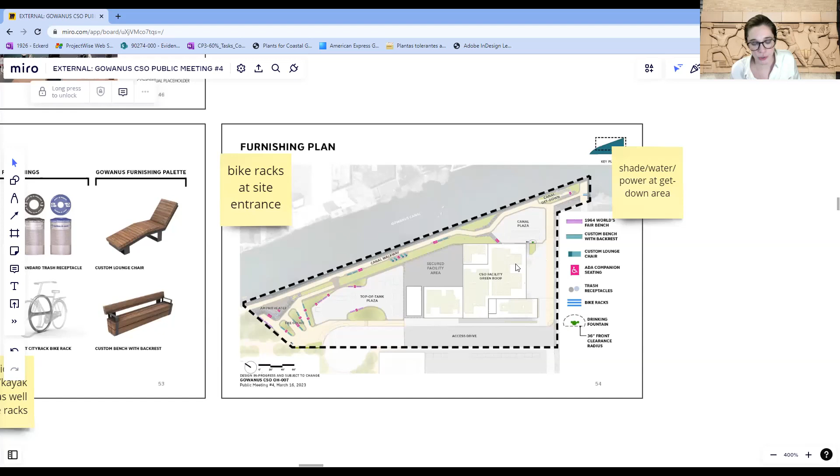We will get to them, thank you. I do want to say, since we're right at the drinking fountain topic, we're talking about having at least two, I think that's where we are now. One of them, Jessica can you point it out, there it is, will be in that Canal Plaza, pretty close to the 2nd Avenue street end. And then we're looking at doing the other one attached to the building that will have the restroom. I believe that when they're attached to a building they can be weatherized, so they can be available year round. There's an alternative one that's available year round, used at the Whole Foods parking lot. It doesn't necessarily have the water bottle filling features like the Prospect Park ones do, but it requires going below the frost line, and we'll keep looking into it. I think it was WXY that designed it. It may not have all the dog and water bottle filling features, but at least it would allow use.

And thanks again for hearing that 2nd Avenue is so important. Yeah, absolutely, thanks for all your input, Owen, we appreciate it.

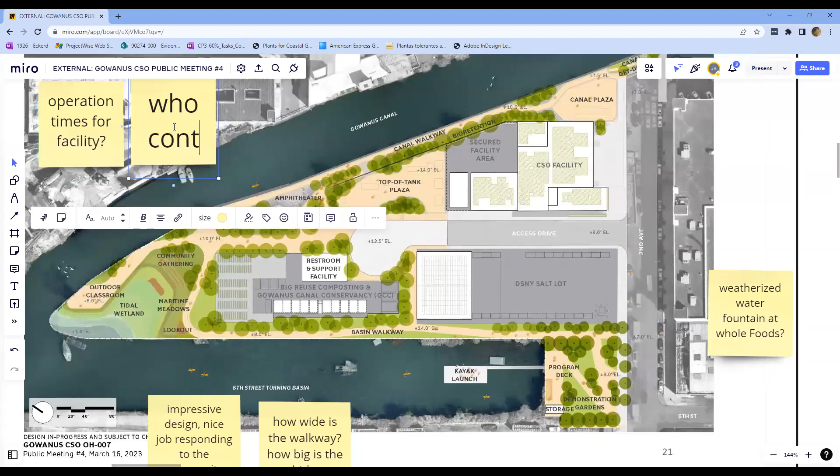Number 1, what is the time of operation for the facility? Number 2, who will control the access to the dock and the storage facility? And I bring to your attention that in the middle of the summer, when it's 85, 90 degrees and the water is hot, there's a lot of people do boating at night.

Yeah, so I'm going to ask Kevin Clark to speak to this, he did respond to you in the chat Louis, but I'll ask him to just speak those answers out loud in terms of time of operation for this space. That's something that has come up at prior meetings. It's not our intention to have this site fenced off and locked up at night, but it's still something we're working through as we continue along with design. So thank you, and Kevin, do you want to answer those questions you answered in the chat? Sure.

Scalability is a difficult one to answer. The way I answered it in the chat is that the CSO facility at 4 million gallons already greatly exceeds the EPA's record of decision requirements to reduce CSO solids discharges to the canal by 58 to 74%. That's the estimate they came up with during development of the record of decision. In the end, we agreed to build a 4 million gallon tank here, and that's going to reduce CSO volume discharges by 85%, greatly exceeding EPA's estimate. With the treatment that occurs in the CSO facility, the actual solids reduction associated with the CSO discharges is in excess of 90%.

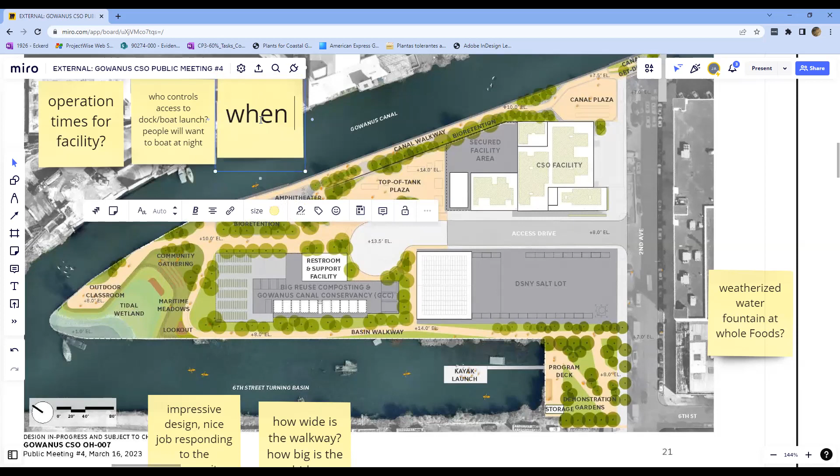And the questions about time, et cetera, and control of the access to the canal? Yeah, so on the operation times, do you mean when will the facility be open to the public? Number one. Number two, I got a feeling you're probably going to lock the dock, and who will control that lock, as well as the storage facility.

So Louis, sorry, I did answer that question already. We're still figuring that out. Okay.

I'm just scrolling through the chat a little bit. I see Alexander Black asked, what will it look like at night? What kind of lighting will there be for buildings and walkways? That's a really great question. We are just getting our lighting consultant on board, and so that piece is lagging just slightly from where we're ready to share out today, but we really wanted to get this program in front of folks and share out in response to that. So noted, Alexander, and we'll have more information to come.

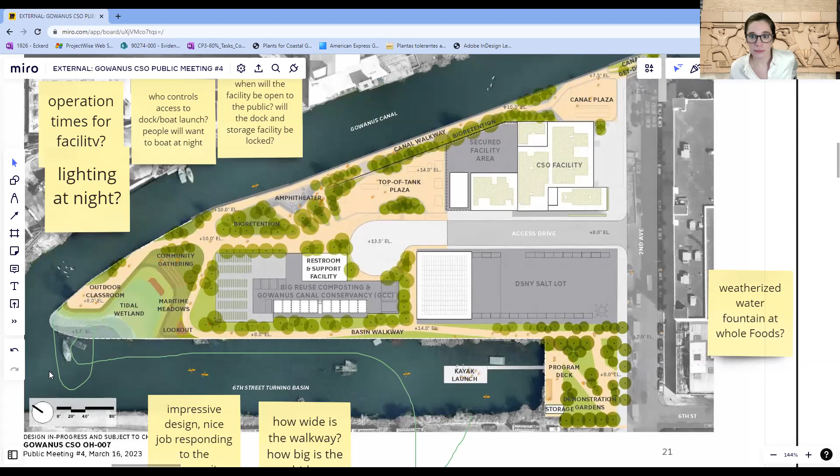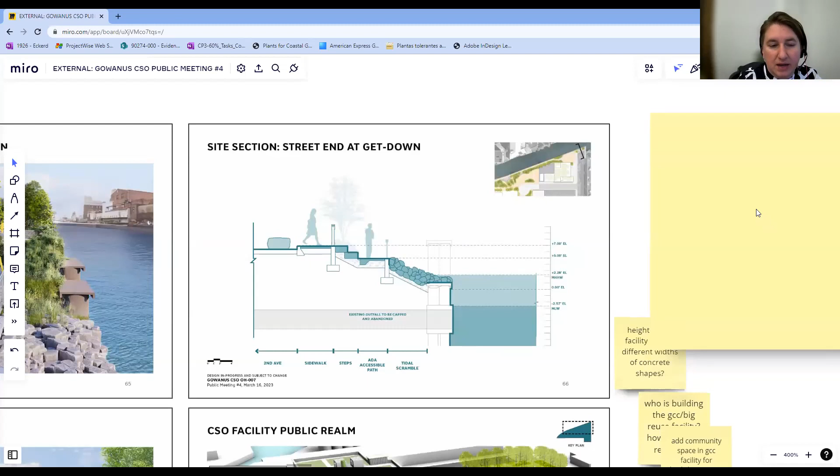Hi Peter, just wanted to clarify the 2nd Avenue get-down. I can't tell from the drawing, is that low tide, high tide, medium tide? How easy is it to use it all the time, in theory? It is at high tide. So it's not designed to be a boat access, but it is a scramble down at high tide.

Any chance it could be a boat access? Well, it's a scramble, right? So the goal is to replicate and improve upon what's been there historically and what folks have been using. The biggest issue is just the site constraints, working around and maneuvering with the street itself and all the areas needed for subsurface access for the facility. We really tried to make this as large as we could, and it is very tight. In order to make it ADA accessible, you need a lot of length, and there's just not a lot of length to get down that low.

So the platform itself is at elevation 4 or 5, and then it's a kind of informal scramble down to high tide. So it's just for getting close to the water, and you'd go around to 6th Street to actually get into the water. Is that the plan? That's what we would encourage.

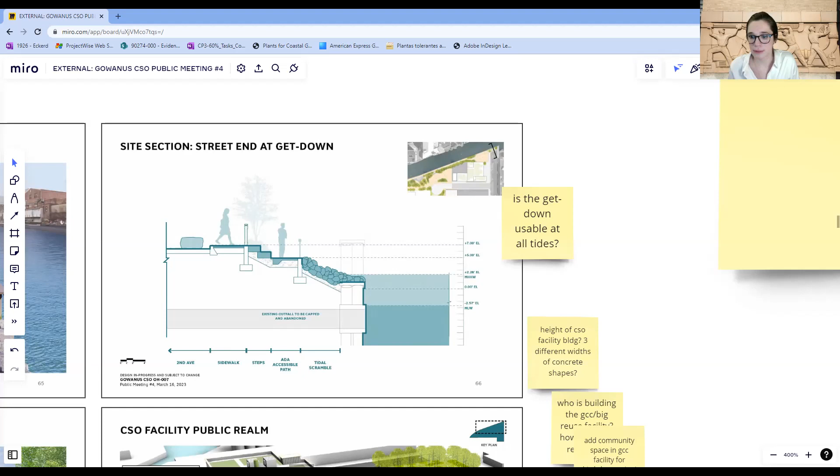So we just wanted to talk through some of the next steps. We're going to be taking the design of the head house and the surrounding public realm through public design review, public design commission review. And before we do that, we will be presenting to Community Board 6. I've been in touch with the district manager there, and we'll be scheduling that probably for next month. In terms of construction, phase 1, as Kevin said earlier, is set to begin in summer 2023, with site prep and sanitation facilities work beginning in June. As Kevin mentioned, we will have a community liaison, and we'll be making sure everybody has that contact information as we get closer to construction start.

If you want to provide additional comments, this is the email address where you should send those comments: Gowanus Owlshead CSO at dep.nyc.gov. I monitor that email account, so you will get me. And this presentation has been recorded and will be put on our YouTube page along with the other three public engagement meetings that we've had.